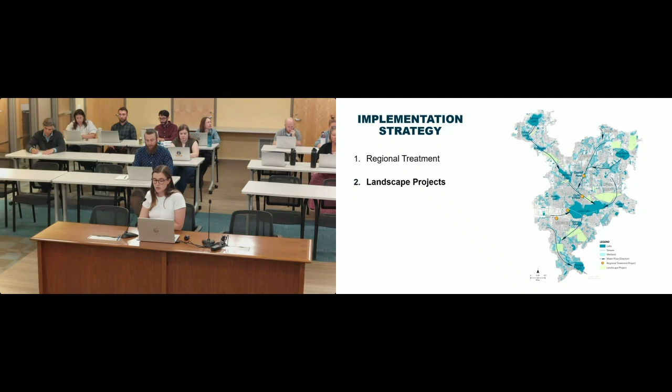The roadmap prioritizes projects that address the root causes of water impairments, and we categorize these projects into types by order of best practice operation. First is regional stormwater treatment, recommended as the first step to cost-effectively treat large drainage areas within the subwatershed, and County Road 6 is a great example of that work. Second, the roadmap identifies opportunity zones where other landscape projects could be implemented to reduce pollutant loading, often in parallel with regional treatment. The third strategy is addressing internal loading through alum dosing after the landscape projects have been advanced.

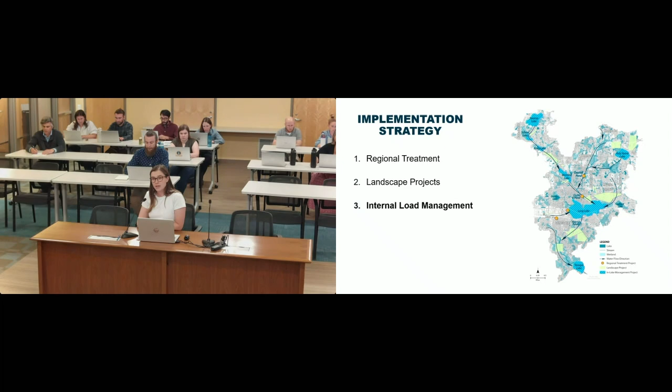So the RFP for the feasibility study that I'm here to talk about tonight focuses on the downtown management unit within the Long Lake subwatershed.

The downtown catchment totals 518 acres that span from the Orono schools on the far west side to about Red Rooster and the historic downtown area on the east side of town. This management unit area has nearly 4 times the volume of nutrient loading per unit area compared to other management units draining to Long Lake. This is largely due to the high amount of impervious surfaces in the commercial industrial corridor between Old Highway 12 and the bypass.

So the roadmap identified Holbrook Park as a potential regional treatment opportunity. Because of the high nutrient loading in this management area, district staff, with authorization from the board and with support of Long Lake, chased grant dollars to fund feasibility for regional treatment. In 2022, the district was awarded $175,000 from BWSR to conduct a feasibility study at Holbrook Park.

With County Road 6 project completing design and preparing to go out to bid this summer, we thought it was time to pick up this project again and get something else in the queue for the subwatershed.

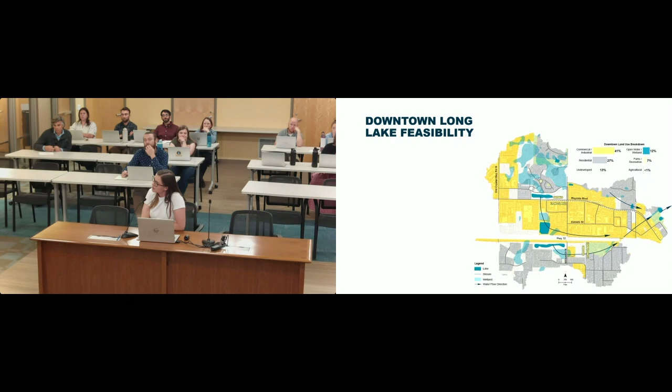Okay, so our other project that we did before is not involved with this, it's further down? Manager Miller, yeah, that's right, further east. This is on the west side of Long Lake. So I don't know if you've got a map that shows the whole sub-watershed somewhere.

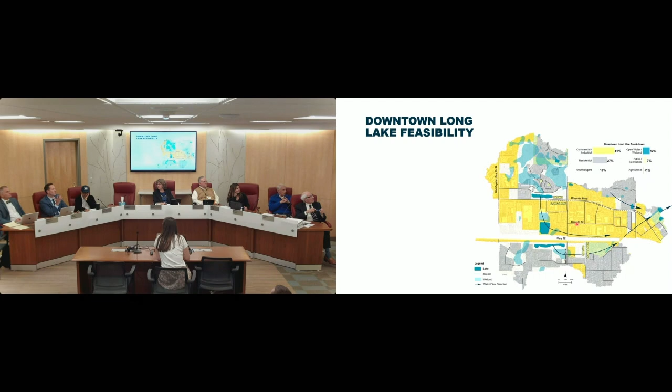If you go to the next map, Rachel. This one's fine. So our County Road 6 pond, you can see is directly north, that orange dot on the north right there, Rachel. That's the County Road 6 pond, and it receives all the drainage from the northern two tributaries to Long Lake.

No, I'm thinking of the other one. Yep, and then south of Long Lake is Long Lake Creek, where we worked with Met Council Environmental Services just south of the highway, Rachel, right there, just south of Long Lake, to restore that basin.

And this project is in the highly impervious western area that drains east into Long Lake, actually draining through old projects that have the Nelson Parkside ponds that we have responsibility for. So the aim of the feasibility study is to look at...

There's those ponds over in Stone Bay and Orono. They flow south into a big MnDOT pond. It picks up that drainage by Holbrook Park. It flows through a small channel in Nelson Parkside ponds. It's to treat this, look at the whole drainage for the whole city, figure out how it all works together, and what the opportunities are for new projects.

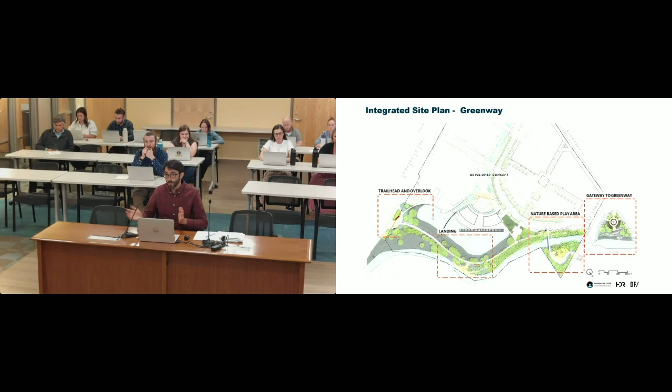I wanted to step through a little bit of a timeline for Cottageville Park itself. We spent a lot of time talking about Blake Road, but wanted to give a little history on Cottageville Park, which we've spent less time discussing.

All the way back in 2010, the district acquired parcels for the expansion of Cottageville Park, including 415 Blake Road, which is where the future Gateway will be located. At that time, the district and the city of Hopkins entered a cooperative agreement to design and construct Cottageville Park, which occurred in 2016.

The two remnant parcels, now the Gateway and Nature Play, were paused for advancement based on ongoing road construction and Met Council lift station projects at the time, with the goal of advancing those in coming years. As we geared up to do Blake Road, it made sense for contracting and design efficiencies and consistency to roll those remaining Cottageville parcels into Blake Road, but they really were always considered part of the Cottageville project.

Fast forward a few years to 2020, and the district and Hopkins executed a new cooperative agreement for the development of 325 Blake Road, which included those remaining Cottageville parcels. Around the same time, the district executed a design contract with HDR, and to fulfill that cooperative agreement, rolled in the design of what became Nature Play and Gateway to Greenway.

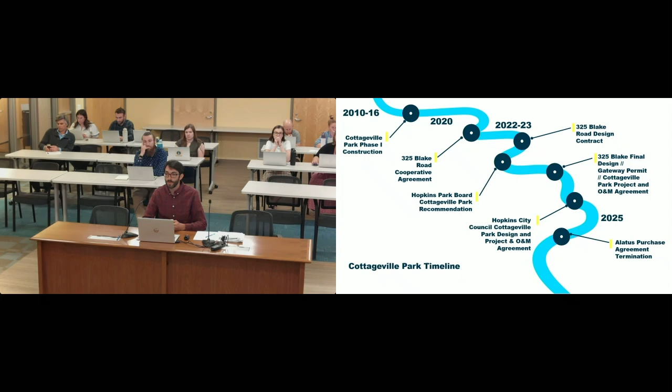At the time, the intention had been to move into construction relatively quickly. However, we all know that the project has since sat in limbo due to development delays until March of this year, when the board directed the issuance of a notice of termination for the purchase agreement, which has unlocked the opportunity to advance the project.

I showed a few of these slides last month, but now that we're really focused in on just the Gateway, I wanted to remind the board of the design intent and some of the specifics of the project.

You got a weather alert after service? I've been watching the weather all week, my heart almost— I guess we're on a low level, so we're safe with what's coming. Are we okay? We don't need to shelter in place? Quick, run upstairs. We'll all go together. 80-mile-an-hour winds. Okay.

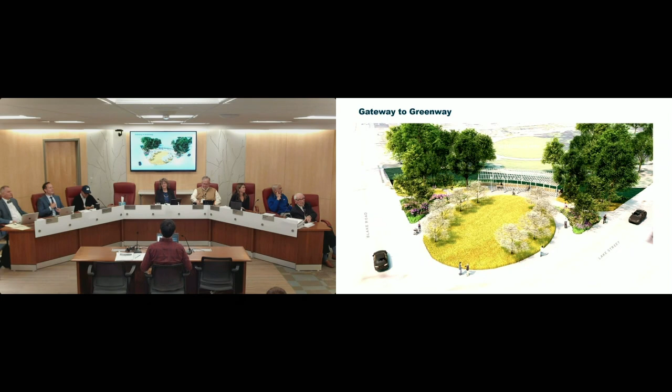So the Gateway parcel sits at the intersection of Lake Street and Blake Road. A lot of the design here was an attempt to mitigate some of the traffic noise so that people still had an enjoyable experience, taking advantage of existing grades and constructed grades to try to separate seating areas as much as possible from the road.

Again, the large oval, which was planted with native pollinator species, reflects what you can see over in the existing Cottageville Park, underneath which is the stormwater pipe gallery. This design allows for future installation of a large public art piece if that's something the board or city desires, but it also functions as a place for pollinator species, with some uplit trees.

The pergola is another unique structure to this project. There are swing seats there, which provide a really nice, unique view of the creek, as well as over into the activity and plantings on the other side of the creek in Cottageville Park. And finally, we've added some other architectural details, branding this as the entryway into the greenway, all the way down to Methodist Hospital.

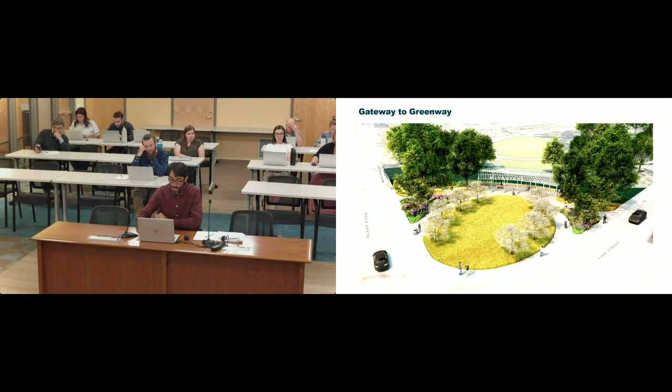This is just an aerial view, and again, this would be sort of if you're hovering in a very low hot air balloon on the other side of Minnehaha Creek, giving you a view, trying to figure out what elevation this is landing or at.

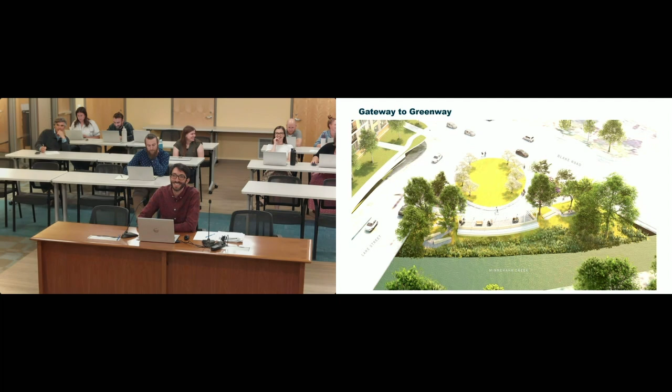And here's a bit of... it's next year's field trip. We thought swan boats were fun.

So again, as a reminder, this is not really a water resources project, but we've tried to integrate thoughtful stormwater treatment where we can. These rain gardens are designed to treat rainfall that occurs on this project site itself.

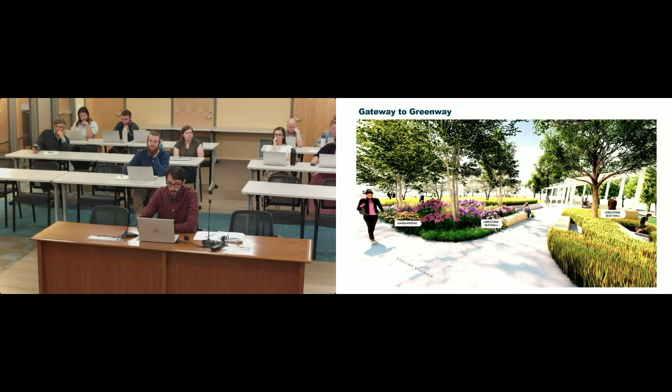And again, some seating options all throughout the gateway. A little bit washed out here, the colors, but you can see we've branded the top of the pergola with Minnehaha Creek, so if anyone from street level can't actually see down to the creek, there's a visual indication that there is a natural resource here.

Another view of the swing seats and what we were calling a wetland fringe. There wasn't a lot of room for a large restoration, but where we can, we've introduced the appropriate vegetative species.

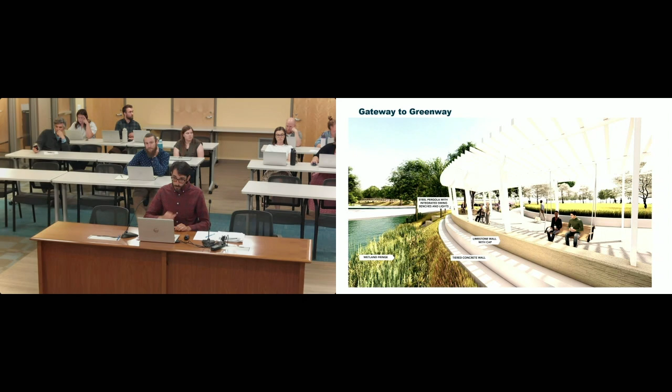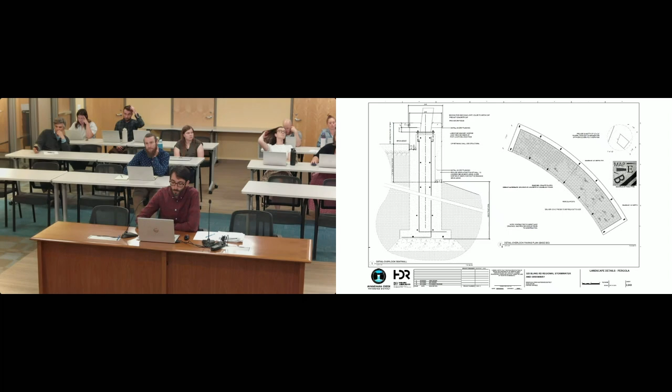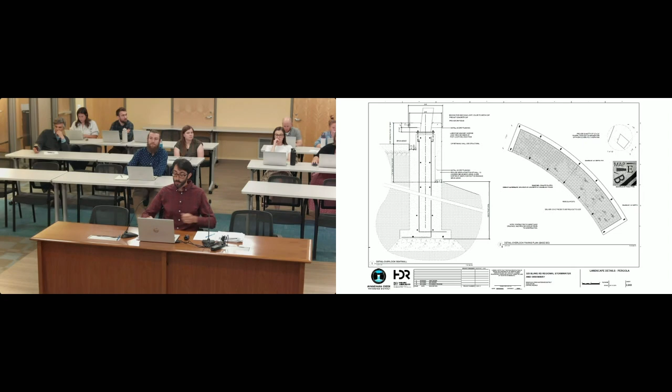Not a colorful rendering, but here you can see the decorative pavement. The intention is to bid it out with large granite pavers that are engraved with pretty much a full map of the watershed, all the way down to the Mississippi. That would be underneath the pergola. So either you could walk along different areas, or look down and place yourself in Cottageville Park where that exists, all within the watershed.

Mike actually did a little bit of my work for me during the CIP discussion, talking about costs.

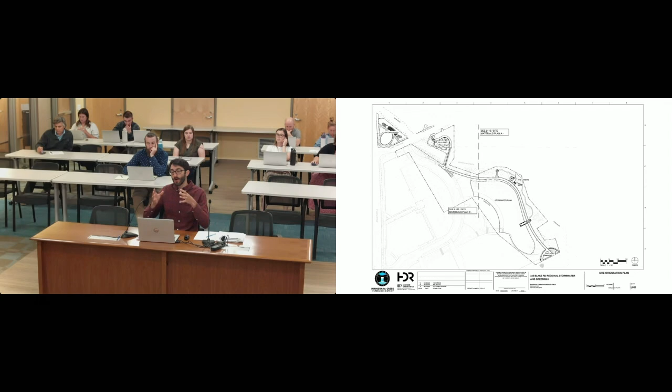So moving into the contract amendment itself, this is just sort of illustrative again to remind everyone that we had final construction documents, drawings, specifications for the entire project. And so now the task at hand is to pull out everything except for the gateway. While we're doing that, we also, in order to minimize the number of new amendments that would need to be brought forward and to try to forecast everything that's going to be needed to bring it from repackaging the design all the way through construction.

As Mike mentioned, we went ahead and had HDR also scope out and budget what they think it would take to not only separate out the construction package, but also support the district in bidding and review, and then do construction services, so all of the monitoring and everything all the way through construction. I'm going to break this out a little bit so everyone can see where the dollars and hours are actually allocated per task.

But just wanted to note that as we get into construction, we want to avoid any delays and having to come back to the board with amendments or changes to this. So that's why we've worked with HDR to make sure that we build in the hours that we reasonably expect would be needed to account for any addenda throughout during a somewhat complex construction.

So the first task, which would begin fairly immediately, would be starting to separate out this construction package. That includes separating out all the drawings. We have probably 100-ish pages of construction drawings, and a lot of those overlap between different components of the project. So we'd be pulling all of that CAD line work out just for Gateway to Greenway, then matching up our full project manual specifications just to that Gateway to Greenway.

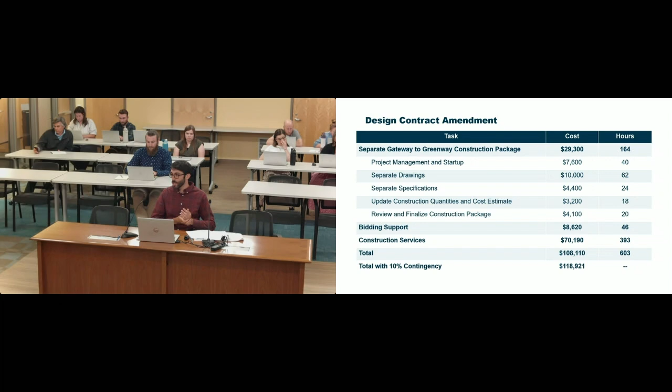So we'll retain, I do have numbers somewhere, but I think we had about $25,000 in this bidding task, which about half remains. And then we have about another 17,000-ish to bid out the rest of the project. So we're leaving those untouched and separate.

Yeah, but that's a good question. I'm not just saying that. That is good, it's a good question. Where'd you hear that?

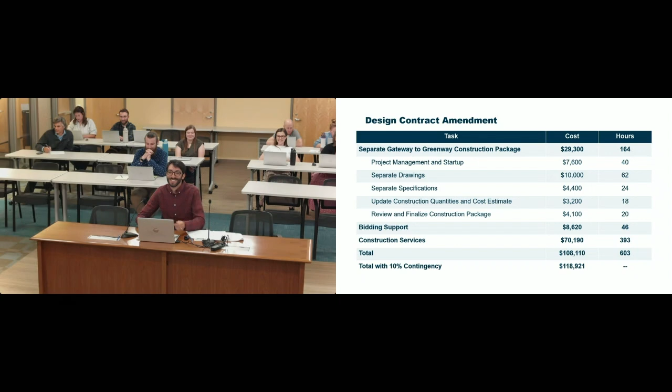Second task is bid support. Once we have a finalized construction package, this is to get all the documents uploaded onto our bidding website. We'll have a pre-bid meeting where contractors can attend, and a process where if there's questions on our drawings or specifications, we have hours allocated for that. I should note this is both HDR and Damon Farber's combined hours. The scope of work breaks out who's doing what, but generally the hours are allocated about 50-50.

I think that really reflects that Gateway in particular is pretty heavy on landscape architecture. There's no large stormwater facility at this point, so things like the pergola require structural engineering. We have custom lighting, which requires electrical engineering. So some of those are taken care of by HDR, some of that is.

And that will take us all the way through tabulating bids and getting a recommendation.

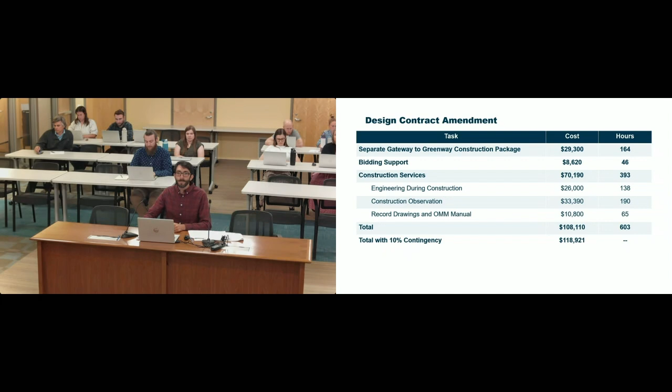The final task, which actually makes up a large part of this overall budget, is construction services. This is any sort of engineering services needed during construction - construction observation, having HDR and Damon Farber staff on site periodically on a scheduled basis to make sure construction is proceeding according to plans. When we have specialty items like the engraving of granite, there's shop drawings that would come in and get reviewed. Certain items are getting staked by Damon Farber to make sure of location.

And then at the end of construction, creating record drawings. Any updates we would need to the operations and maintenance manual at that time would get rolled in as well. We don't anticipate any major changes, but the project agreement we have with Hopkins does require us to work with Hopkins if there's any significant changes to the design.

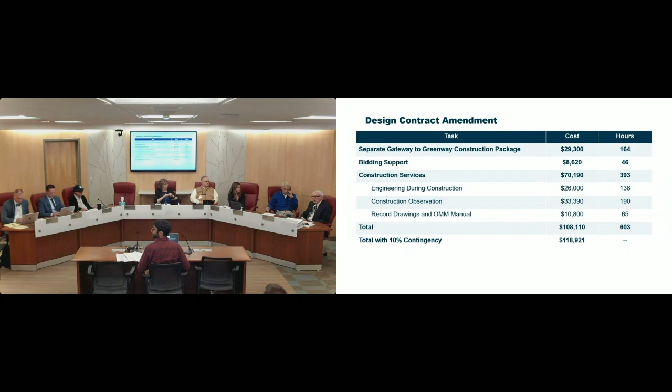Question, Manager Miller? I have no idea whether this is reasonable or not - do we have our engineer or anybody look at these proposed activities and costs? President White, Manager Miller, you mean our district engineer or? Yeah, or somebody, you know.

Well, Mike and I went back and forth several times with HDR. I also reviewed several previous scopes of work for construction services, Arden Park and Wasserman, to make sure these costs were generally in line. From that review, I'd say these costs are slightly more expensive, and I think that's because we have hours for both landscape architects and engineers, which isn't always the case - that there would be so many landscape architects allocated a percent of the overall contract. We did, from that review, find the initial numbers for the bidding support task came in high, and we worked with HDR to bring those down to a level we thought was appropriate for how many hours we've seen past projects take to bid.

So I think there's additional hours in there because of the dual specialties involved. But...

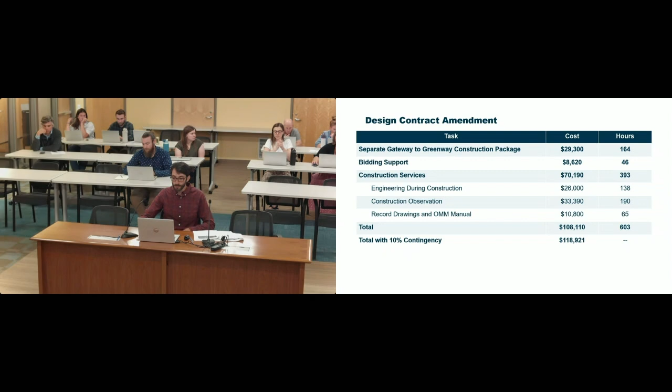Well, with that, my last slide is just what we anticipate the project schedule for the gateway to be and how that relates to overall Blake Road.

We would expect over the next week or so to be able to get this contract amendment in place, and that would allow work over the summer to break out the bid package. As I mentioned, we have a conditional permit from the district - it doesn't trigger a lot, just erosion control - but we would be working closely with the city of Hopkins to secure the building permits for the project. What kind of permits do we need?

From the ones that I'm tracking right now, the pergola structure would require a building permit for footings. We may need a sign permit to say Minnehaha Creek on top of that. We'll probably need a grading permit, and we'll need access road permits. But we do intend to meet with city engineering in the next couple of weeks to find out if we have an accurate understanding of the full list of permits or if there's anything else to be exploring.

But the sign permit you might want to get before you finalize plans, since they could alter that. We do intend, in the detailed project schedule, to have several iterations where we'll get nearly final designs, which we'll use for the permitting process.